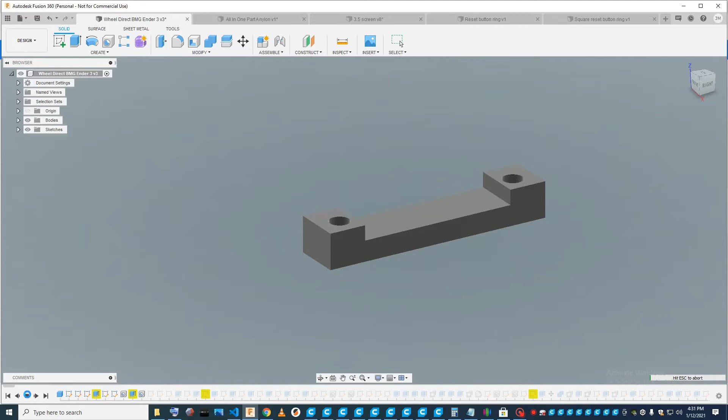So let me show you this here. We're going to start playing how this part starts out. At first I wasn't sure what I was looking at here, but those screw holes gave it away. What I'm looking at right there is some kind of linear rail carriage. And there's the holes for the carriage, two of them.

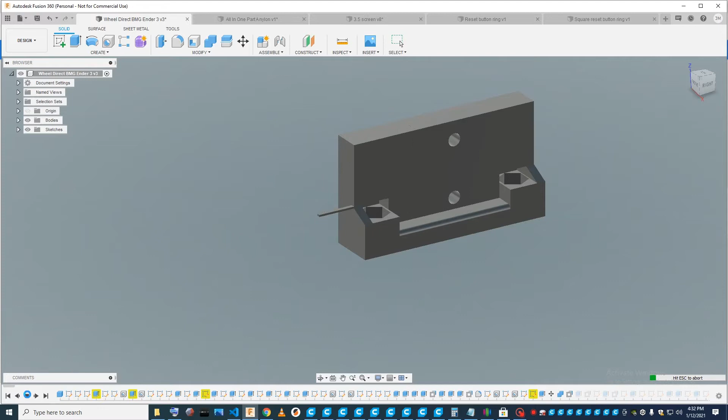So we're looking at right here the Y. This is the very first linear, the Y linear. Then it was shortened. The first one was for a C carriage, then it was shortened to an H. And then now it's evolving, that part is evolving into the bottom part of the X linear rail system.

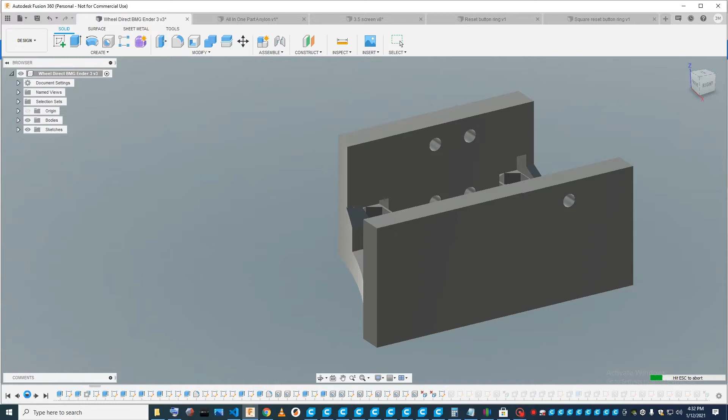And you're going to see this develop, and this develops into the first bracket we had for the X. Just a lot of fit adjustments here. This was very hard to get right. I don't know why the holes are jumping around, but as far as the fit itself...

Problem is that from print to print, printer to printer, from filament to filament, the gap was changing too much, and not everybody could have success with that bracket.

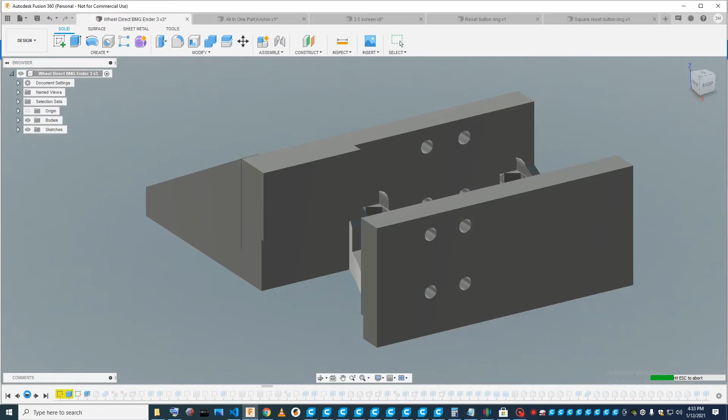Alright, so now this bracket, that was the chain being put on, that's what you're seeing right now. Or no, now what you're seeing is this bracket evolving into the direct extrusion version. Let's pause this.

Okay, I backed it up to watch this part again and change the angle a little bit, so we'll be able to see how this morphs into the direct extrusion version of this.

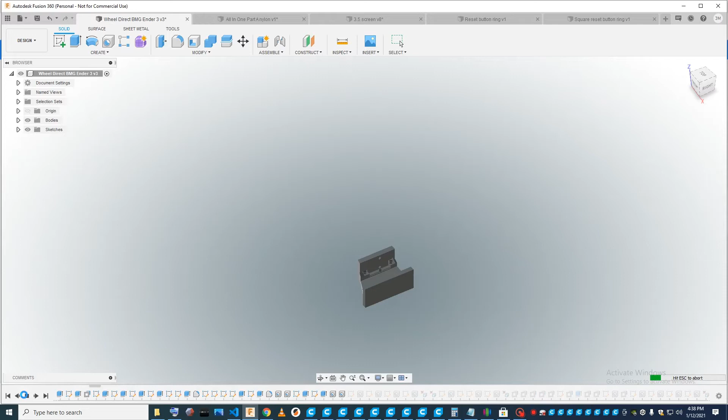There was a little bump up to try to change the dimension a little bit of the inner, and then there you go, it goes back down again. Like I said, that bracket had issues. It worked, mine worked awesome. But as far as everybody else getting it, no.

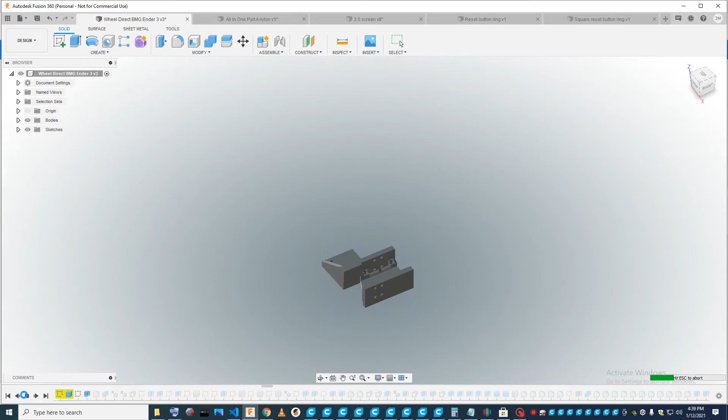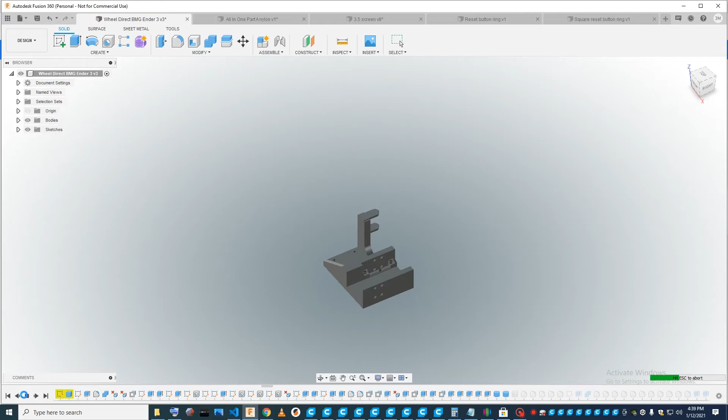Alright, we're just working the chain here a little bit. There's some slight little tweaks here and there. So we move the whole thing up a little bit, is what we're seeing there.

So, okay, now we're going into version 2, the two-piece linear bracket. We're getting rid of the bottom part, and we're going to make that bottom part slightly adjustable with the screw holes.

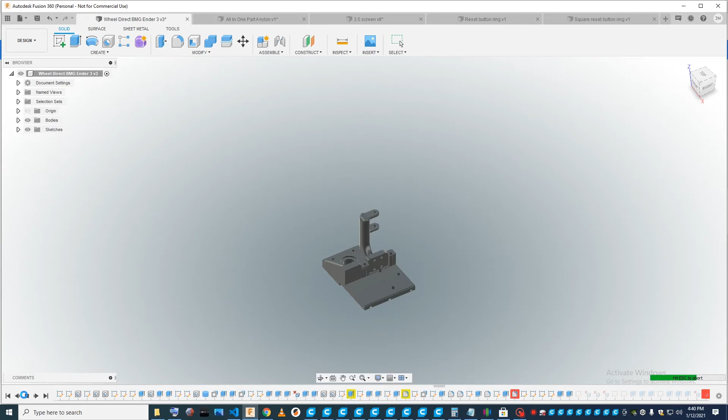Now this right here was done to get more clearance, to hide the screws in the back. They were sticking back too much. Now on the 5 Plus, which I originally did, it wasn't a problem. I mean on the 5 Plus, but when you put it on the 3, it was a problem. They were in the way, hitting the bars that hold the Z, the linear for the Z.

All right, now that whole thing morphs into the first generation wheeled direct extrusion bracket that was never put on any printer that I know of. It's totally beta, probably doesn't even fit. Although it was based off a working bracket, so it had a chance.

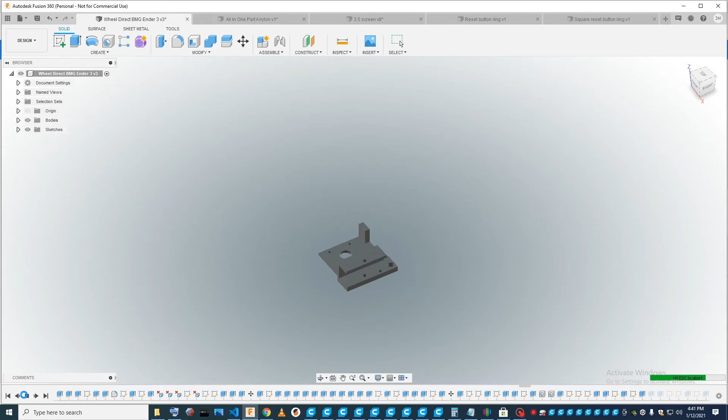Alright, now that turns into the second generation, that's the second generation direct extrusion bracket for BMG. First generation BMG direct extrusion.

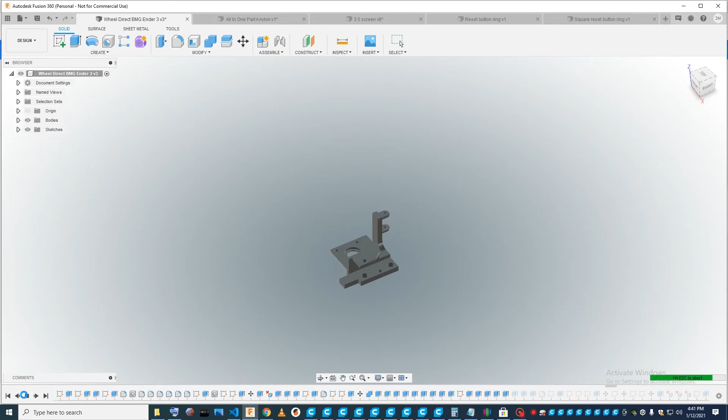Alright, now that part right now is going to morph into the Ender 3 BMG bracket that is currently in development and on its second print. So that should happen here in a second, and there you go, it flipped sideways. And then everything down here is going to be different, so all kinds of stuff has to change.

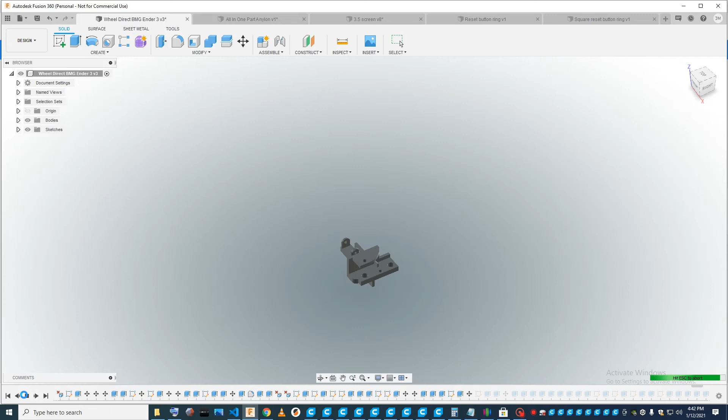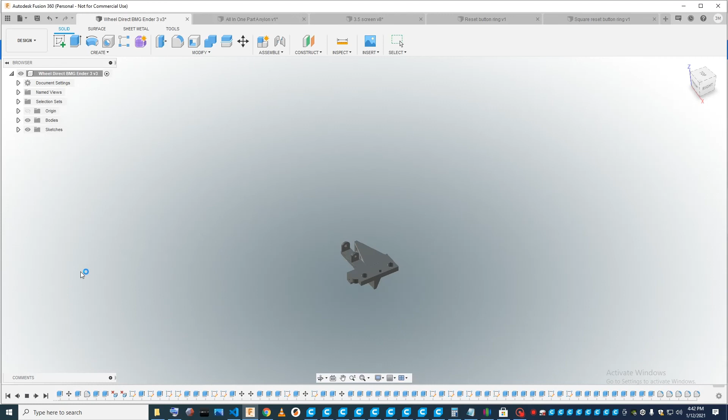That is one crazy file right there. I love it. Yeah, that's like a series worth of work in that step file. And it's all subdivided, so it's left a trail of babies all over the place.

So yeah, here's the new bracket that's on the printer right now. So the problem with the Ender 3 is it's real tight on the side rails, so the bracket could not have that piece that stuck over it.

Could have. I could have left it there, I think, if you had just the right screw and you could get the nut on, but it was going to require, instead of having two nuts, so a nut and then the retainer and then another nut, it was going to have a washer, and then the retainer was going to have to be just perfect dimensions, and then the nut was going to have to fit on.

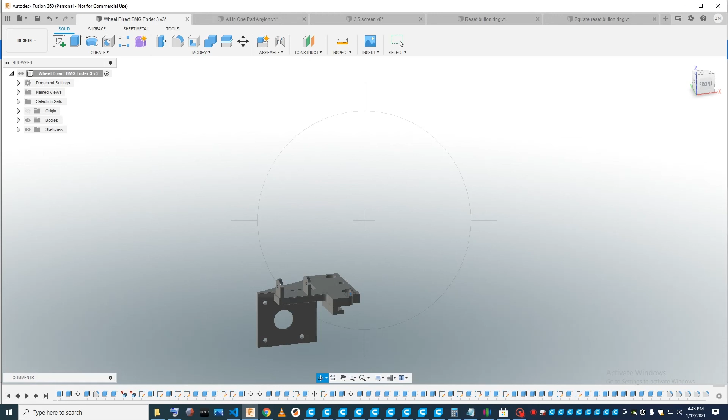And I thought that would have put the wheels really, really close, but I could have carved out for the wheels. I could have recessed like a millimeter and a half just where the wheel was going to rub. But I'm going to try this.

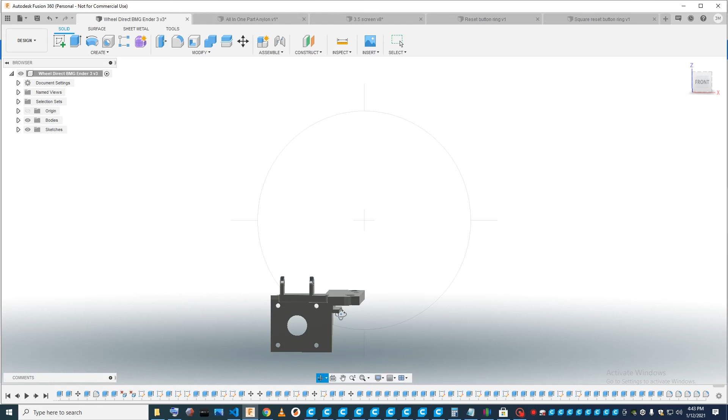And what this is, is a little hook that's going to hook on the front. And once these ride on the bushings for the wheels, and if we're hooked onto the front bracket, good, then we're golden. And you got just enough room right here for your bowden tube to be coming through.

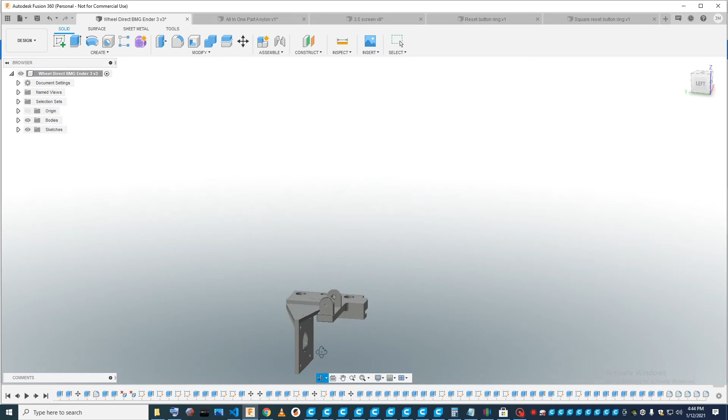And like I said, we got her on the printer, and so your motor will sit right here, and then your BMG and this gear opening will pretty much be in your face, unfortunately. But yeah, if you have a plastic one, if you have a metal one, I guess it's enclosed.

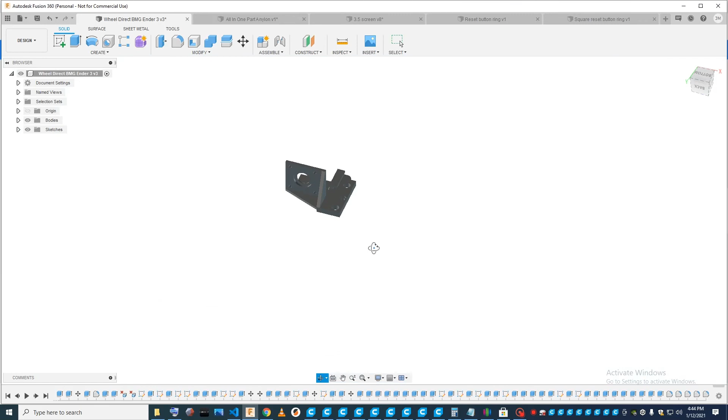Alright, so we'll print this up and we'll see what happens. I thought that was interesting. Good luck, everybody.